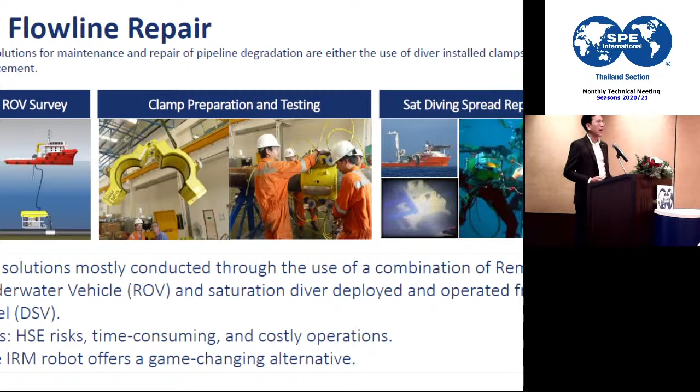However, the picture of our workers performing field work involving high risk, such as deep down under or in confined space areas, seems to be a normal part of our operations. So despite the high risk and high cost nature of this, a view from outside has said that AI and robotics have been somewhat underinvested and underutilized.

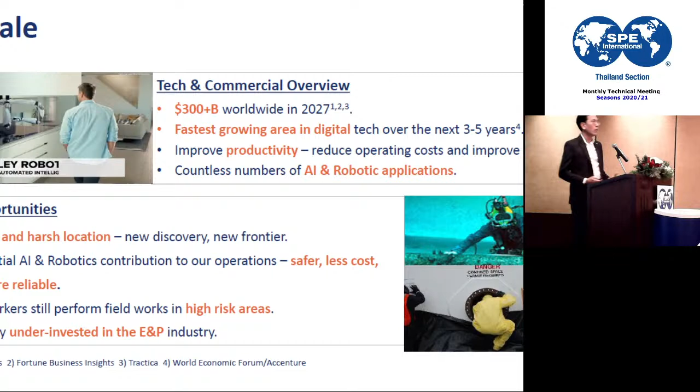Having said that, it doesn't mean nothing about AI and robotics for the industry. I'd like to highlight robots that have been part of our industry for quite some time. A remotely operated underwater vehicle, or ROV, helps protect and maintain subsea assets, whereas unmanned aerial vehicles, so-called drones, are now being used to inspect facilities.

In reality, our E&P industry is still somewhat far from full automation, but early returns from applying such technology to our operations are promising. With the unmanned feature, robots can minimize the need for direct exposure to potential hazards, resulting in improved safety, cost efficiency, and carbon footprint of our operation.

With the ability to perform inspection differently, unnecessary plant shutdowns and production loss can be avoided, which in turn translates into revenue savings. Ultimately, all together this will lead to better productivity of our business.

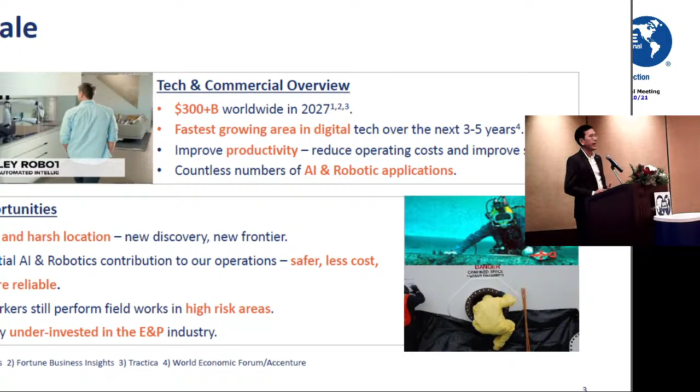From conception to prototype to trial and further to commercialization, we combined various approaches to test our AI and robotics, resulting in an increasing number of AI and robotics initiative projects over the past few years, covering land and sea. A few significant ones: in 2014, we had our first lab-scale AUV.

The following year, we were among the first movers in Southeast Asia to commercialize drone technology. In 2016, we successfully implemented a low-cost crawling-type inspection robot in one of our onshore oil fields.

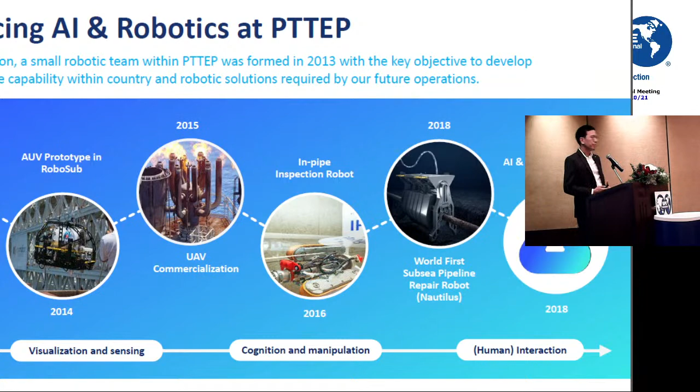A new exciting project recently is a subsea flow line control and repair robot. Our AI and robotics contribution to reducing operating costs and improving operations was quite evident, combined with a promising outlook for the digital technology part of the industrial revolution.

PTTEP has decided to spin off our team into a separate business entity for AI and robotics ventures in 2018, with the vision to become an AI and robotics platform partner.

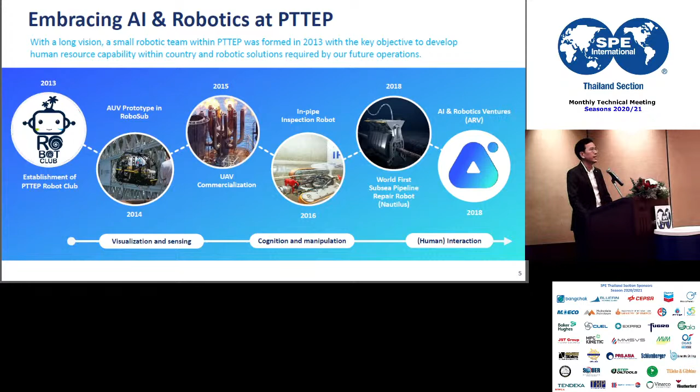ARV is dedicated to becoming an innovation platform to leverage cutting-edge AI and robotics technology to simplify business solutions. And we not only focus on oil and gas applications, but also see opportunity to grow in other areas beyond oil.

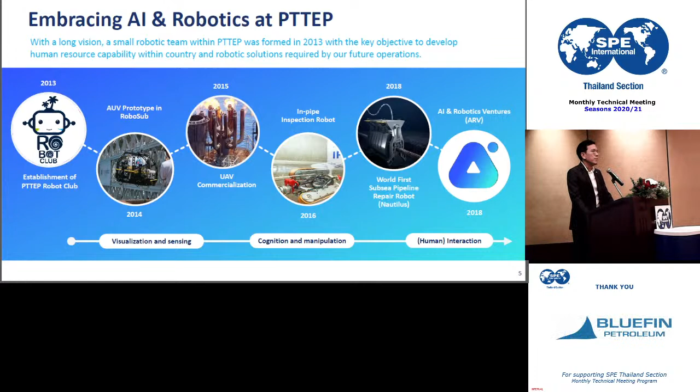Achieving all three aspects at the same time is a challenging task, but not impossible. Offshore facilities are critical assets - maintaining them in good, reliable, and working condition is a challenge for most. Failing to do so may result in negative impacts in terms of production, life, reputation, and environment.

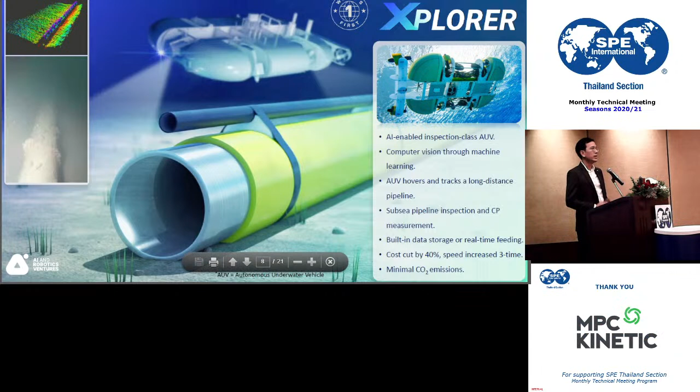Research and development of a new type of AUV intended for subsea pipeline inspection. Unlike those already available in the commercial market, our Xplorer AUV inspection class, enabled by AI computer vision, has the capability to cover and track a long-distance pipeline to perform visual inspection of the subsea pipeline from the outside, and also to perform CP autonomously with minimum human intervention.

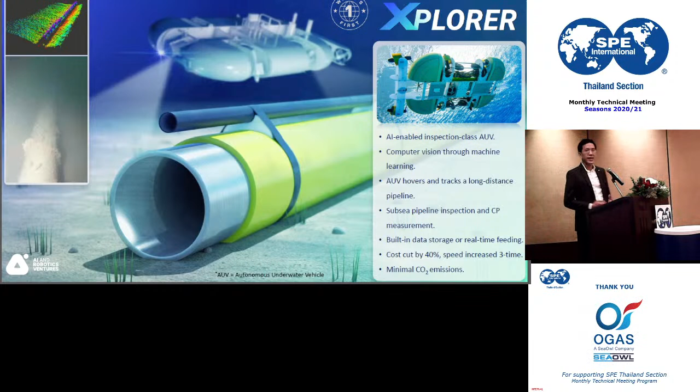Inspection data can be stored in data storage, like the Explorer, which can either be received after the mission or via live streaming. With this new technology, subsea inspection cost can be cut by at least 40%.

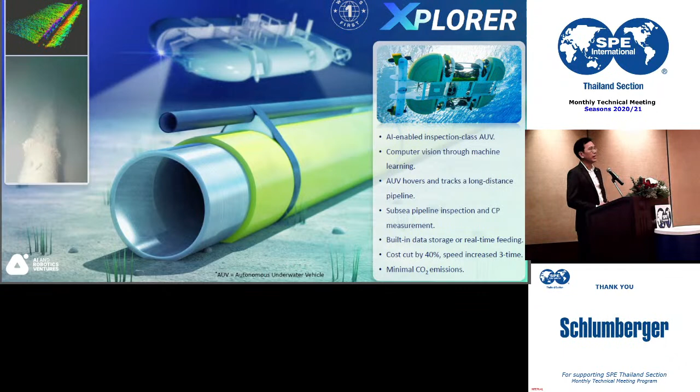Now, without a large supporting vessel to follow, subsea inspection operations can be completed in a much shorter manner. Equally important, without a large supporting vessel, our subsea IRM operation range will be wider.

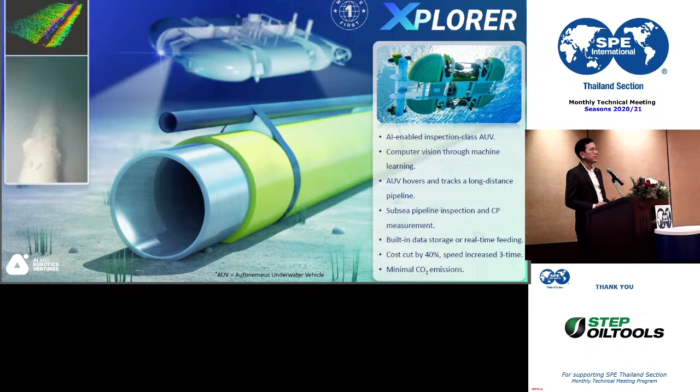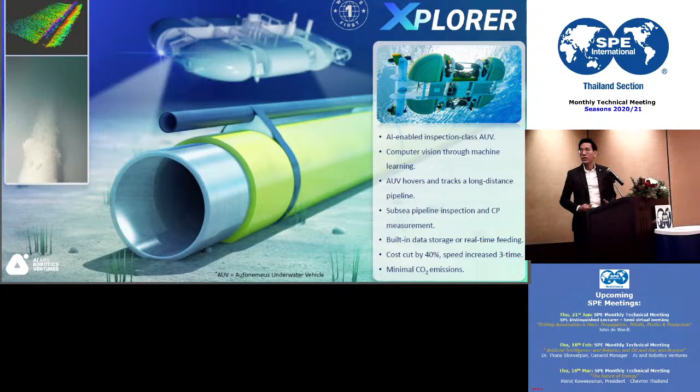Now let's move from subsea pipeline inspection to subsea pipeline repair. The dominating solutions for subsea pipeline repair are either diver-installed clamps or sectional replacement. Both technologies mostly rely on a combination of ROV and diver deployed and operated from a diving support vessel. So in addition to the HSE issues, these two technologies are costly and time-consuming.

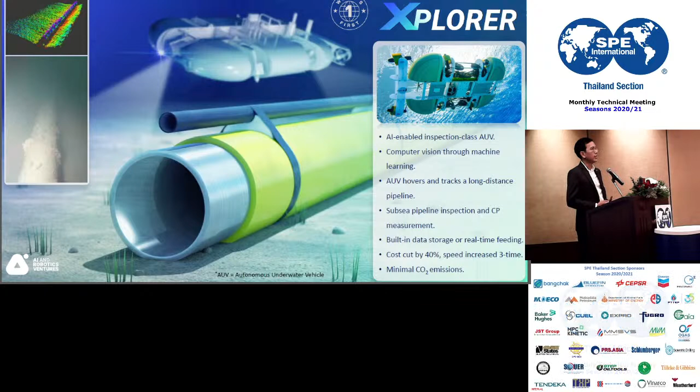Therefore, a cost-effective IRM robot would offer a game-changing solution for this segment.

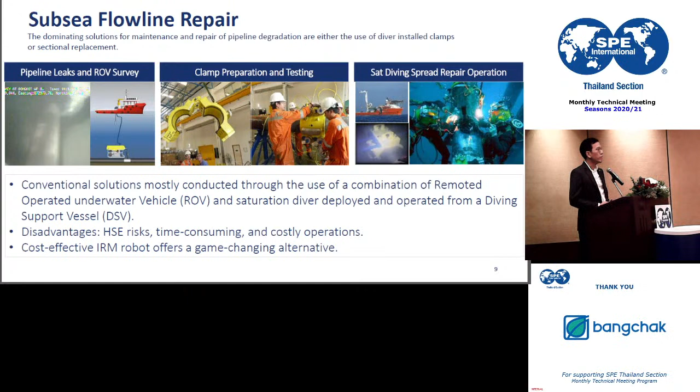The repair method of the Nautilus represents a novel approach combining robotics and material science. The resulting system allows the subsea pipeline to be repaired in a much shorter manner without having to deploy a single diver to the seafloor, and as a result, at least 40% cost saving over a conventional diver-installed clamp approach can be achieved. The Nautilus is the winner of the ADIPEC Award for the Breakthrough Technology of the Year 2020.

We affirm the level of technological advancement and innovation of the Nautilus at a global scale.

Now let's move from subsea to more ground level operations. Let's see how technology can add more value to our topside operation.

Typically, our E&P operations require people under personal protective equipment or PPE to be able to perform operational tasks safely at the site. However, PPE is sometimes not properly worn. Therefore, compliance monitoring is required to ensure safe operation and the safety of our workers. And so far, the only control over PPE compliance is through visual inspection, either directly or via a system.

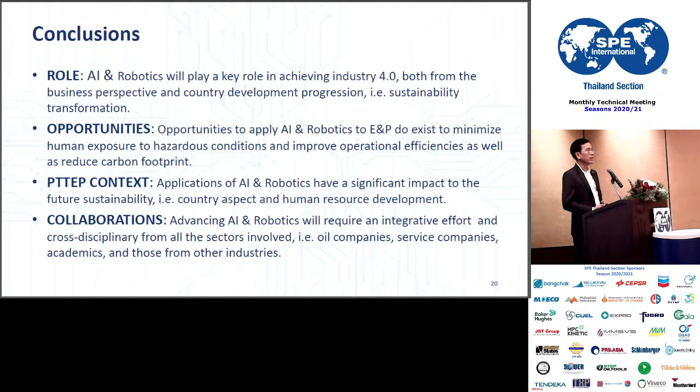Last but not least, advancing AI and robotics to the next level will require effort and cross-disciplinary collaboration from all concerned parties, trying to come together, work together, and unlock the potential of the technology.

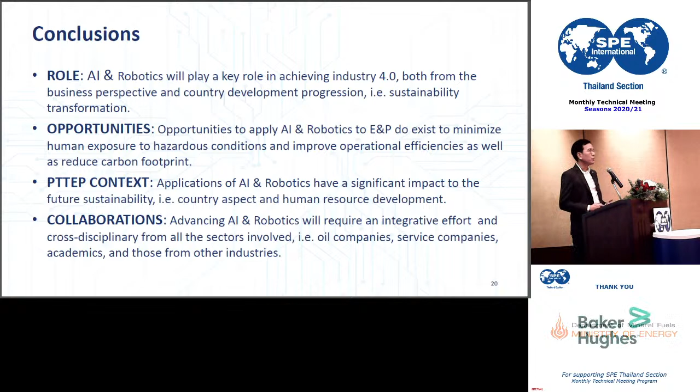I would like to end my presentation by expressing my thanks to PTTEP management and my ARV staff now for their support. It would not have been possible for me to be here presenting this topic.